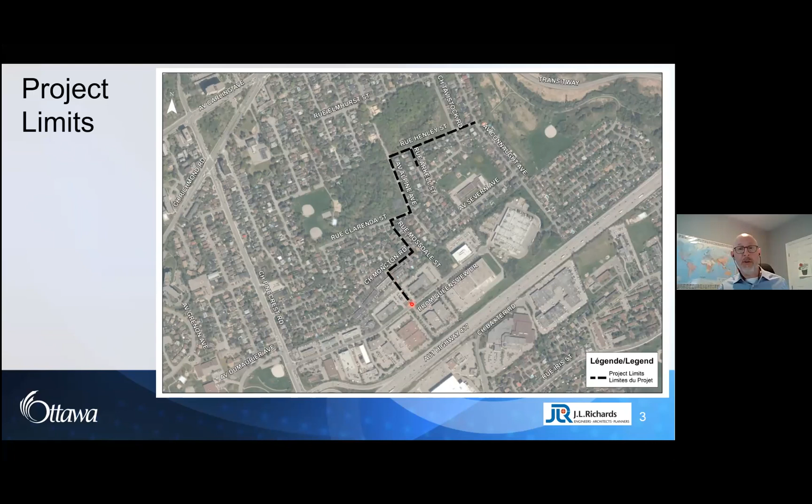So essentially, I'll give you a quick overview of what type of work we're going to be doing, and I'll elaborate further on some of these points later in the presentation. What's driving the project is having to replace an aging trunk storm sewer that runs through the neighborhood on Moncton, Mossdale, Clarenda, Alpine, and Henley Street. We're going to be realigning a section of trunk storm sewer and trunk sanitary sewer along a portion of Alpine and Henley Street. We're going to be replacing the local trunk storm sewer and sanitary sewers at the north end of Arkell with new local sewers. We're going to be abandoning a section of existing trunk storm and sanitary sewers within an easement that runs between Alpine and Arkell.

As part of the work, we'll have to replace select sections of sanitary sewer and some water mains, as well as house service laterals impacted by the trunk storm sewer replacement. We'll be reinstating roadways, grass boulevards, and any landscaping impacted by the underground work. There'll be utility relocations, much of which has already taken place, including gas relocation work on Moncton, Mossdale this past fall, as well as on Alpine. Lastly, there'll be fairly extensive tree planting to compensate for existing trees that have to be removed to accommodate the trunk storm sewer installation.

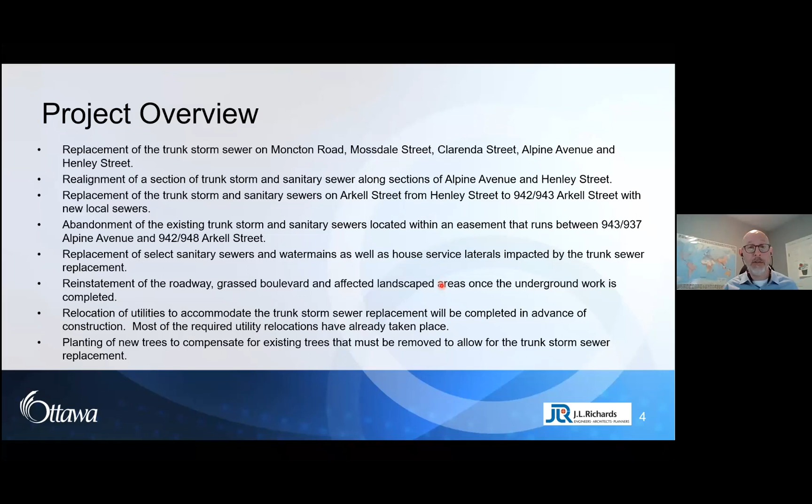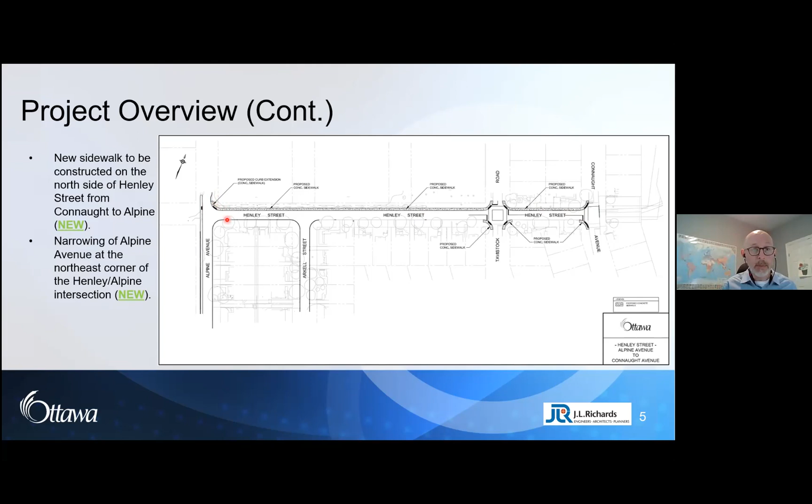One new component to the project, different from the previous public information session, is that the scope of work has been expanded to include construction of a new sidewalk along the north side of Henley, extending from Connaught to Alpine. At the northeast corner of Alpine and Henley, Alpine will be narrowed slightly, or what they call a bulb out, to act as a traffic calming feature along that steep section of hill. That's the new scope added to the project.

Stepping back, what's driving this project and why is it important? Through the Queensway Terrace North neighborhood, there's a large trunk storm sewer running underneath the roadway that drains a very large tributary area. This outline gives you an idea of the extent of the drainage area served by that trunk storm sewer, extending well south of the Queensway all the way up to Baseline.

This critical piece of infrastructure is in poor condition and needs to be proactively replaced within the current project limits. There is a trunk sanitary sewer that runs parallel to the same trunk storm sewer we're replacing, however it's in good shape and not in need of replacement.

Since we're replacing the existing trunk storm sewer with a new pipe, the city is taking the opportunity to improve the overall hydraulic performance of the system by installing a larger pipe than what's currently there.

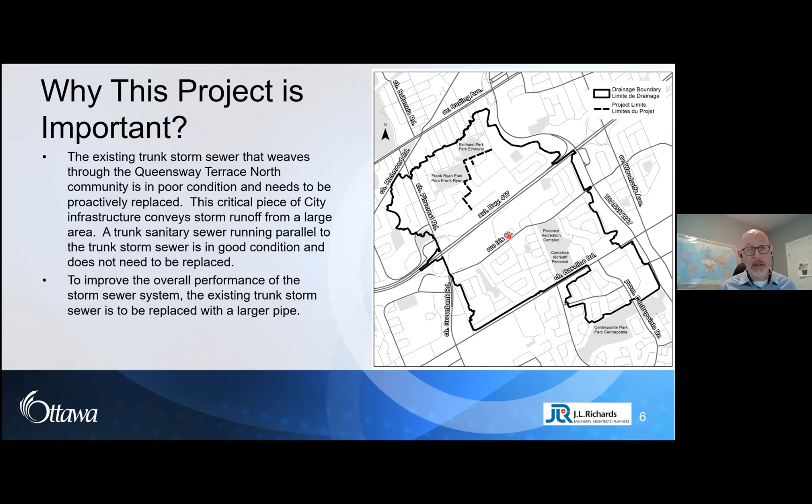We've had discussions with some of the residents in this area, but right now the trunk storm sewer basically runs north down Alpine from Clarenda, cuts over to Arkell through an existing easement, then runs north on Arkell, and eastward on Henley. So right now that trunk storm sewer, and the trunk sanitary sewer that runs parallel to it, is located with homes on either side. We're not able to replace the storm sewer in its current location due to the proximity of the homes.

So the project includes realigning that section of trunk storm sewer, continuing it north down Alpine, and then eastward down Henley Street, where it'll rejoin its existing alignment. Since we're doing that with the trunk storm sewer, we're also going to take the opportunity to realign this section of trunk sanitary sewer. That way, the city will be able to eliminate having these two large pipes running between these homes on Alpine and Henley. People familiar with the area will know the topography is quite steep near the Alpine and Henley intersection.

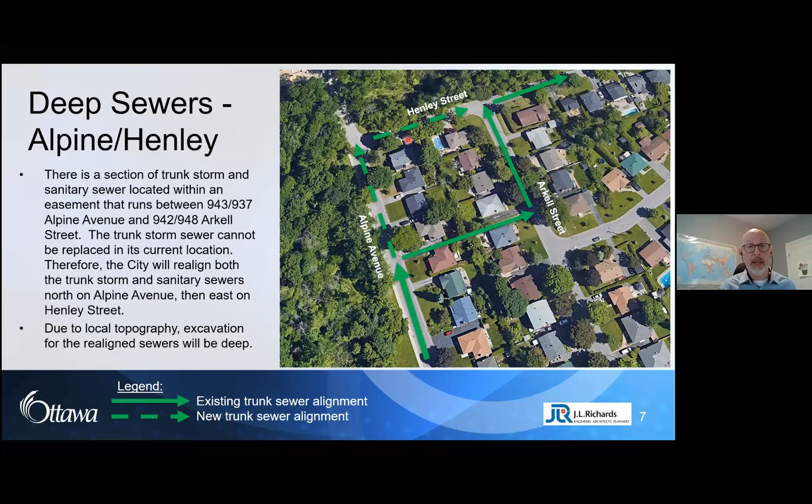As a result of this steep topography, or grade differential, when we're replacing or realigning the trunk storm and sanitary sewers along this section of roadway, the sewers will end up being quite deep. As a result of the size of the pipes and the depth of the sewers we need to install in this area, we're anticipating there will need to be a hard closure of Alpine and Henley that would last for the better part of the 2021 construction season.

However, access is still going to be available to Carling Avenue via either Tavistock or Connaught, so those intersections or accesses would remain open while this is closed. We've had separate discussions with residents in this area, but there is the likelihood that construction work will result in loss of driveway access for an extended period of time. The contract includes provisions for alternate parking as close as we can to people's homes, and requirements for the contractor to construct temporary pedestrian access from these parking areas to people's homes so that they can still access their properties.

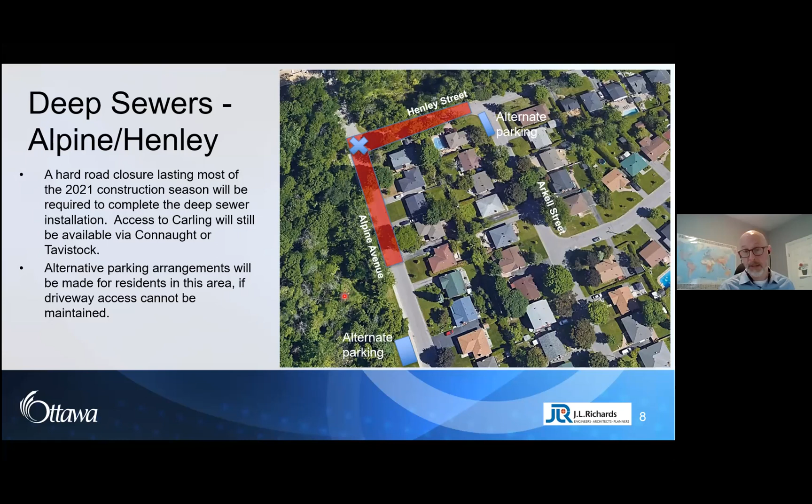We heard this at the last public information session, that the sidewalk along the west side of Alpine is a really important pedestrian corridor, giving the community pedestrian access to Carling Avenue. So recognizing the importance of this pedestrian link, there's a requirement for the contractor to install a temporary asphalt pedestrian walkway along the west side of Alpine, around this deep sewer work, to keep that north-south pedestrian link operational during construction.

Many of you might already be aware that this project will result in a fair bit of impact to some existing trees in the neighborhood. Right now we have to replace the trunk storm sewer in its current alignment, and there's no opportunity to find a different location within the city's right of way to put it. So we have to put the new pipe basically where the old pipe is, and the existing pipe is located in close proximity to, or directly underneath, a number of mature trees, many of which will have to be removed to accommodate the trunk storm sewer installation.

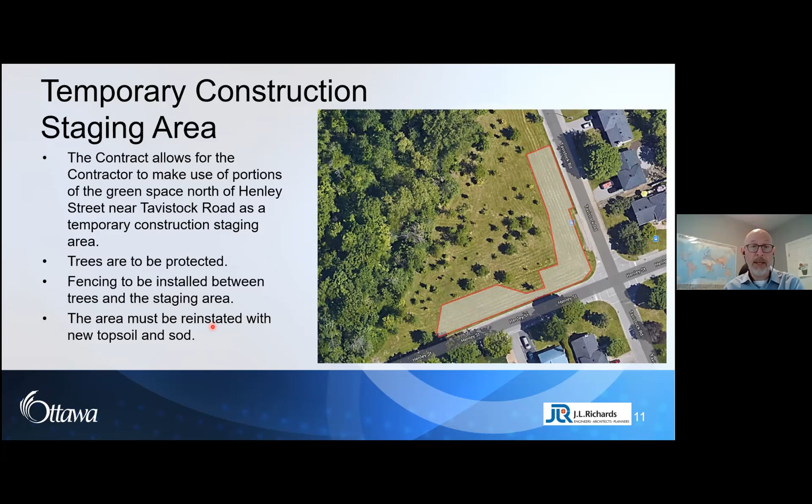So we have a bit more detail now in terms of the project schedule. Right now the project is currently out for tender, so contractors are in the middle of preparing their bids to undertake the work. We're expecting that to wrap up in the coming weeks, with construction starting in late spring or early summer of 2021. The overall project will take place over about 2.5 years, starting in 2021 and wrapping up in 2023.

A little bit more breakdown: in the summer and fall of 2021, we'd expect the contractor to be doing the underground work, the trunk storm sewer installation along part 1, including the realignment of the trunk storm and sanitary sewers we spoke of in that deep section. After that work is completed, we'd see the contractor reinstate the area, installing that north sidewalk we spoke of earlier on Henley, and reinstating the roadway or any disturbed roadway surfaces back up to base course asphalt. That would be completed in advance of winter.

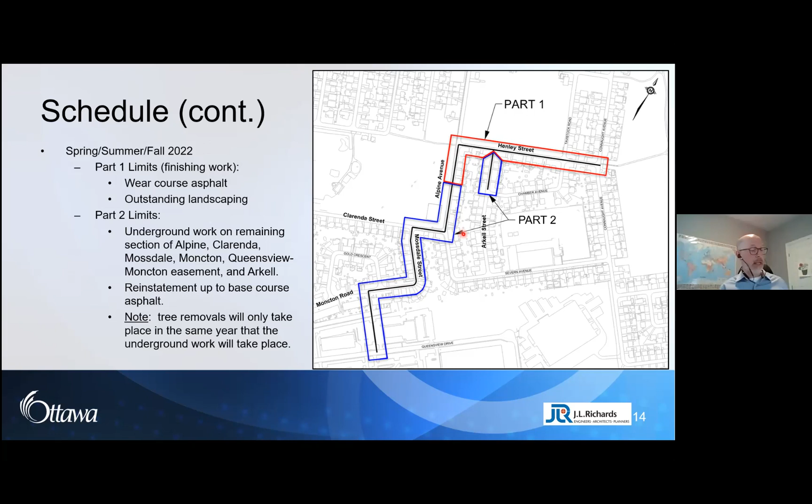So now moving into next year, the spring, summer, fall of 2022, we'd be wrapping up the finishing work on the part 1 limits. That means the contractor would be putting the top coat of asphalt on and any outstanding landscaping. Then you'd be seeing the underground work taking place on part 2, replacing the trunk storm sewer. By the onset of winter, the contractor would have reinstated the roadway back up to base course asphalt. The project would wrap up in spring, summer of 2023, where the contractor would be returning and completing the top lift of asphalt on the part 2 limits and taking care of any remaining outstanding landscaping.

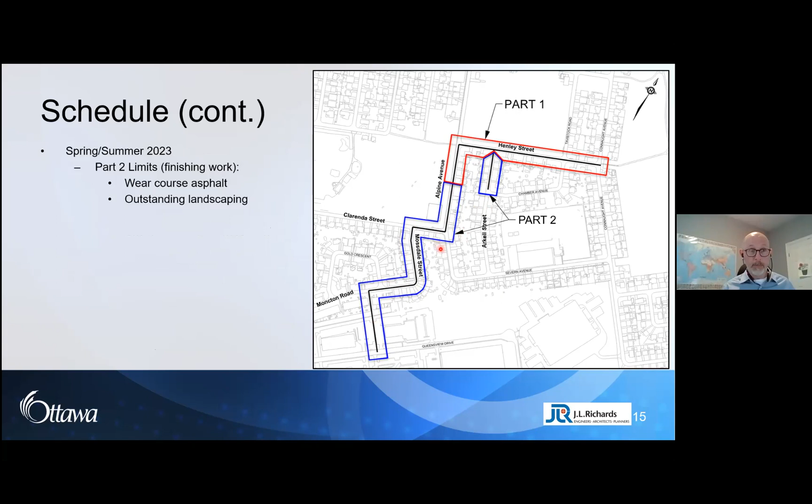So these next few slides will run you through a little bit about some typical things people can expect. Obviously, this type of work will result in some impacts and some disruption. So we're going to go through a few of these items and talk about them, and some of the mitigation strategies.

Generally speaking, in terms of traffic, while the contractor is actively working on a given street, we generally expect that section of street would be closed, with people able to circulate around the adjoining streets and detour around the active construction area. Now, even within the active construction area, local access would still be maintained, so people would still be able to drive to their homes and get into their driveways.

That being said, there would be some intermittent temporary limited access to driveways. As the equipment is digging and installing the sewers, they'll be moving along, and at some point they'll have to move across the bottom of someone's driveway. In those instances, there may be a loss of access temporarily for a day or a couple of days. The project team would be reaching out to homeowners in advance, giving them lots of advance warning of what's coming. People would have the option of the city handing out temporary orange parking passes that they could display on their windshields, allowing them to park on a neighboring street or close by where parking's permitted, without getting a ticket.

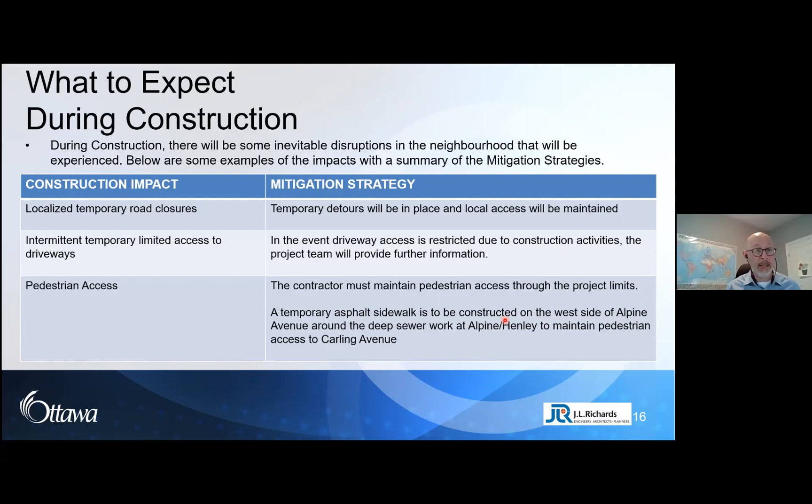Construction noise: yes, there will be construction noise. These types of projects require a certain size of equipment to undertake the work. We do know that in the vicinity of the Alpine and Henley intersection, where some of that deeper sewer work needs to take place, there is rock. The contractor will have to break apart and excavate rock, so there'll be some noise impact from that. The contractor is still subject to the provisions of the city's noise bylaw in terms of how loud the noise is, as well as their working hours, which are all dictated by the city's noise bylaw.

Dust: with construction taking place in the summer, and if it hasn't rained in a little while, there will be some dust generated by the construction activities. Some measures the contractor has at their disposal to help mitigate dust is they will often apply water or apply calcium chloride to unpaved surfaces, to try and limit the amount of dust. The contract also includes use of street sweeper trucks, which would circulate on a regular basis on surrounding streets, cleaning up any dust or debris from construction that might make its way onto the roadway.

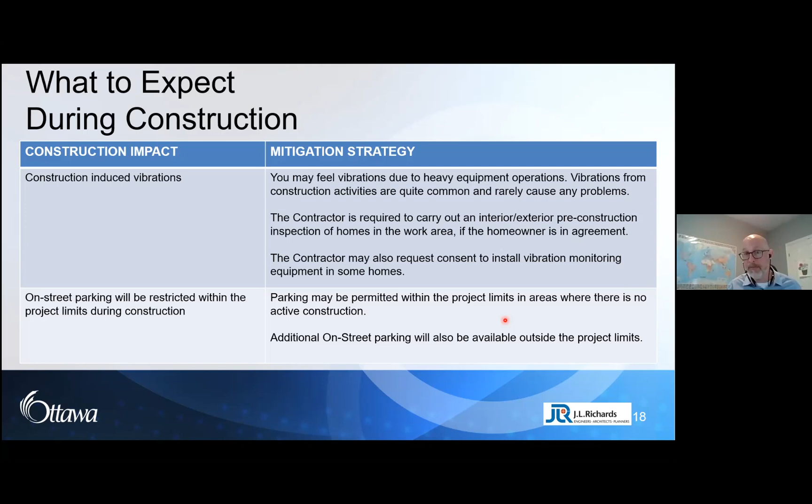On-street parking during construction within the active construction area is generally restricted, since you don't want parked cars interfering with the construction operation. Although as construction gets underway, the contractor may still allow some permit parking within the project limits in areas where they're not actively working. On surrounding side streets, not within the project limits, parking would still be available subject to whatever current parking restrictions are in place.

So, brief water interruptions. In order to accommodate the installation of the trunk storm sewer, there are some sections of water mains and individual house services that will need to be replaced. To carry out that water main work, there may be some brief interruptions to water supply, generally fairly short, maybe several hours, certainly no more than a day. The city's drinking water services would circulate notices in advance, so you'd have ample notice of any upcoming interruption. Again, these are all very temporary.

There are some individuals where the water main replacement needs to be more extensive, and some homes will need to be put onto temporary water services. That means your water, still city water, will be delivered to the home via overland hoses rather than underground pipes. In the process of setting up those temporary water services, there may be some brief water interruptions while homeowners are switched from the current city supply over to this temporary system. We expect homes to be put on temporary water at the north end of Alpine, the west end of Henley where we're realigning the trunk storm and sanitary sewers, and at the north end of Arkell Street. Those are the homes that people in those areas would expect to be put on temporary water.

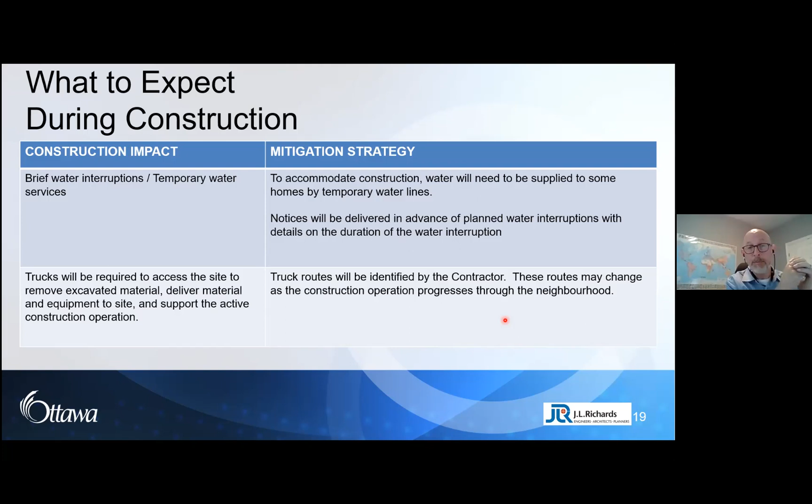That essentially is the end of the presentation. As mentioned earlier, Kevin Gibbs is the city project manager. It's a lot of information to take in, and people may think of a question after the fact. Kevin's email is there, so certainly reach out to him and we can answer people's questions. It doesn't just have to be something you think of on the spot right now. Some questions did come in advance, so if people are okay, I'll run through some of these now.

A question came in about the Alpine sidewalk and whether it would be operational during construction, and yes, it would be. We will have to build a bit of a temporary bypass around the construction, but that north-south corridor will remain active.

As for the timeline for the various stages of construction, we got into that a little bit. Until we get the contractor on board and have their more detailed schedule, that's how we see the project unfolding at a fairly high level.

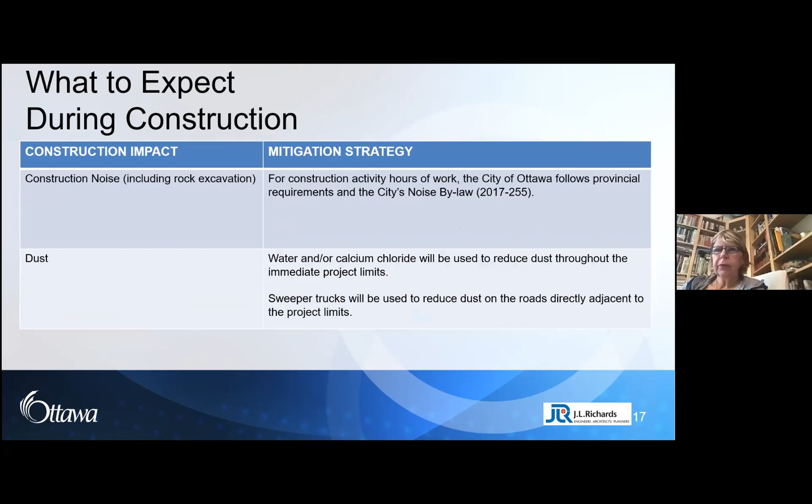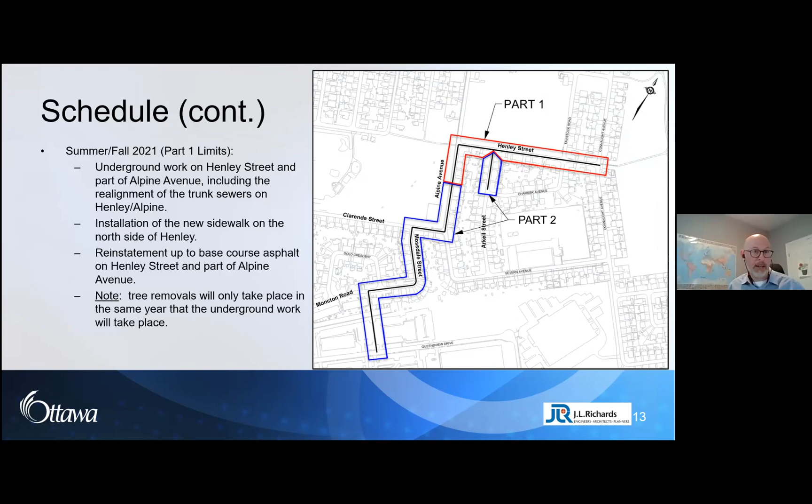Sheila P. is asking about the work necessary to address water flow out of Elmhurst Woods onto Henley in relation to the construction of the Henley sidewalk. So this is about drainage, and I know exactly what they're talking about. Yeah, there's a downward flow. Anytime I've been out there, including this spring, you've got a steady flow of water coming out of that wooded area, running down and topping over the curb and down the street.

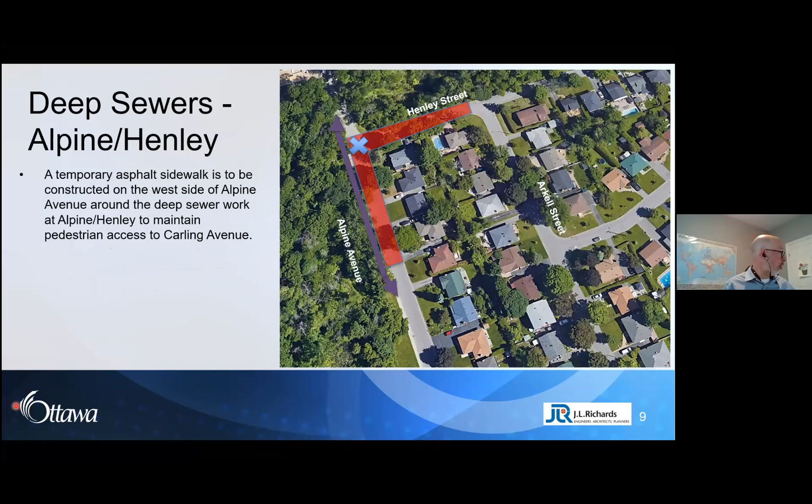So while we are doing that, let me see if I can bring another image over. I'm just going to load up an image here, zoom in, and give it a second so it can refresh on people's screens.

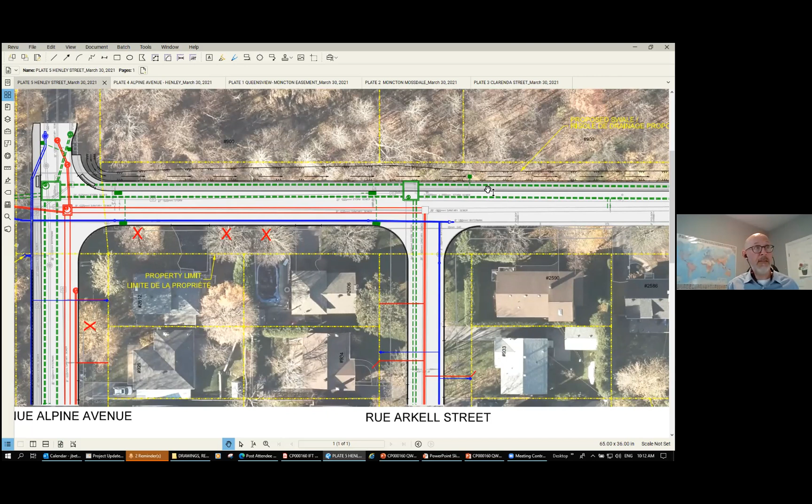As part of the work on Henley, we'll be putting the sidewalk in on the north side, and just in behind that sidewalk we're going to have a nice little swale that intercepts the water coming out of the woods. We'll also have periodic drainage structures just behind the sidewalk that the water can flow into, getting it back into the storm sewer system. So that nuisance runoff from the woods onto the roadway should be eliminated by this project. Okay, excellent question, Sheila. Thank you.

Will there be a requirement for the contractor to control and remove garbage from the site? The prep work left food-related waste that we in the community had to collect and dispose of, especially around the porta potty on Clarenda.

Well, certainly the contractor should be keeping their site neat and tidy and shouldn't be leaving garbage behind. The city does have an on-site representative who will be keeping an eye on those types of things. If people in the community notice the contractor falling out of line, they can get in touch with us or our on-site representative, and we can have a chat with the contractor staff on site to make sure that doesn't happen. We'll make sure we have their email and stay in contact so we can stay on top of things.

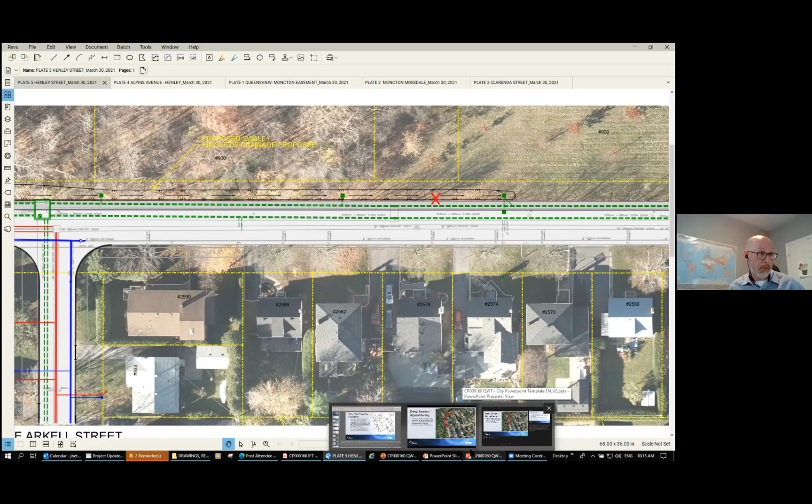So by the end of 2021, before winter, we would expect the contractor to have the pipe in the ground, backfill the hole, rebuild the road, pave the first layer of asphalt on the roadway, replace any curbs, and install that north sidewalk. That's our expectation for the end of this construction season.

Leah is asking whether the Henley sidewalk will be directly beside the road or if there's a separation. Yes, it is - it's what they call a monolithic curb and sidewalk, so the curb and sidewalk are all one piece, similar to the one on Alpine.

There'll also be some work done on the Alpine sidewalk, reinstating it. Yes, where we're realigning the sewers, we're going to reinstate that back. It's always a question of what standard you use when reinstating - new standards, or the same as before.

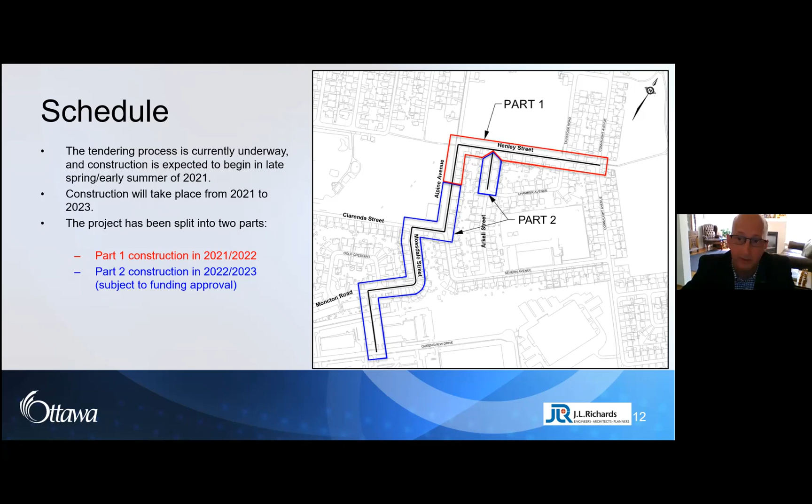Jason, can you pull up the big picture of the drainage area, or the picture showing the perimeter arterial streets? One thing to consider about this construction project is that it's inside a community area, a neighborhood, in the center, so the access and egress of all trucks will be from the perimeter streets - trucks have to take local roads to get to the site. That's the particular nature of this project. Phil, jump in - you or Brittany can speak to that.

Thank you, Councillor. Brittany is here with me - she's the person who looks after all traffic-related issues for construction in the whole city, and she's been working closely with the team on this project. As she mentioned earlier, we're going to be collecting data on streets and can provide you that list, because any changes we make through construction, we want to make sure we have data to support what issues are being seen.

If we see increased volumes or increased speeds, we can look at putting in temporary measures, like the paint on the road mentioned earlier, or other measures with posts and things to create more friction on the road. One good thing about this project for traffic flow within the community is that we're not closing the street - everyone still has access either to Carling or to Pinecrest, so we're not expecting double the traffic at, say, Pinecrest and Kelly, because no one can get through Carling.

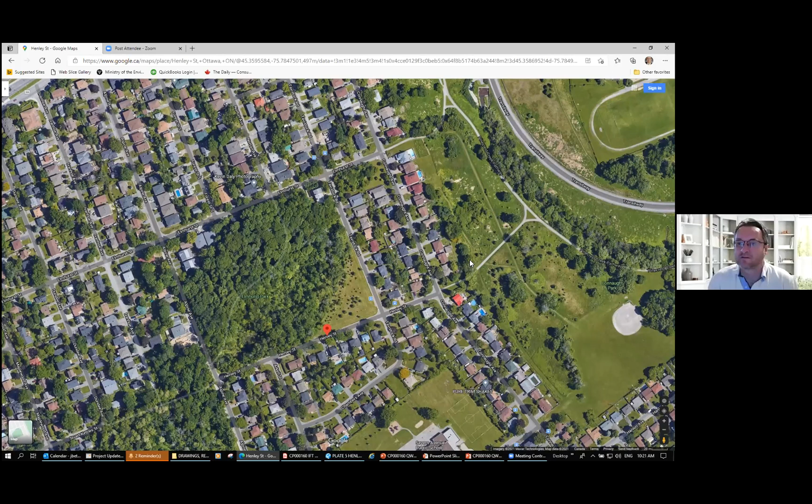Is this during construction or after, when the construction's all done? After, so this is an opportunity to install it. I haven't seen the actual design. I don't know, Kevin, if you can talk to what's being planned.

This was brought up in a comment, and transportation planning is currently investigating the possibility of a PXO, a pedestrian crossing at Alpine and Henley. They're looking into it. It's a detailed exercise where they look into the pedestrian numbers and the peaks and stuff like that. We don't put in PXOs everywhere in the city; we put them in where the numbers justify it. So they have a very specific process with evaluation criteria that establishes if a PXO is justified at that location or not.

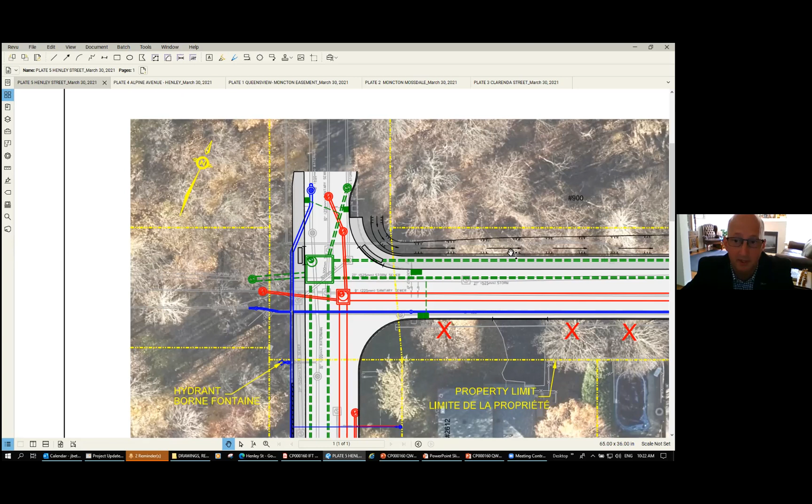So we have to go through the process, and I can keep you posted on how that's developing. Well, that's a bit awkward when there's going to be construction there. Is that going to, I mean, there's just an ideal time here because construction is going on. Just like getting the sidewalk in at Henley, this is an ideal time to perhaps raise it a bit, just so people will slow down. Have a raised crosswalk? Yeah, they're looking into it, so that's all I can say at the moment. I don't know where it stands.

I could follow up, but they're currently looking into the justification of a PXO at that location. During construction, that intersection will be closed, so there will be no problem - it'll be fenced off, people can cross the street no problem. Alpine will be closed at Henley.

Here's a question: have you ever considered that if you put a crossing, there would be more pedestrians? It's kind of a chicken and egg situation rather than measuring it before and after. There's a very specific process to evaluate the installation of a PXO, and it has to go through its detailed investigation process - I can't speak to all the details of that. I can just assure you transportation planning is looking into it.

I would be very interested to see something there, because I think this is an opportunity while construction is going on - just as with the Henley sidewalk, it was decided it was worth doing because you're tearing it up anyway. Great opportunity, and I really appreciate it. This is just a small extension, and because it's going from one wooded area to the other, it's popular, and because of that hill on Alpine, it's a little intimidating because people tend to speed up going down hills. So I'd certainly be in favor of that.

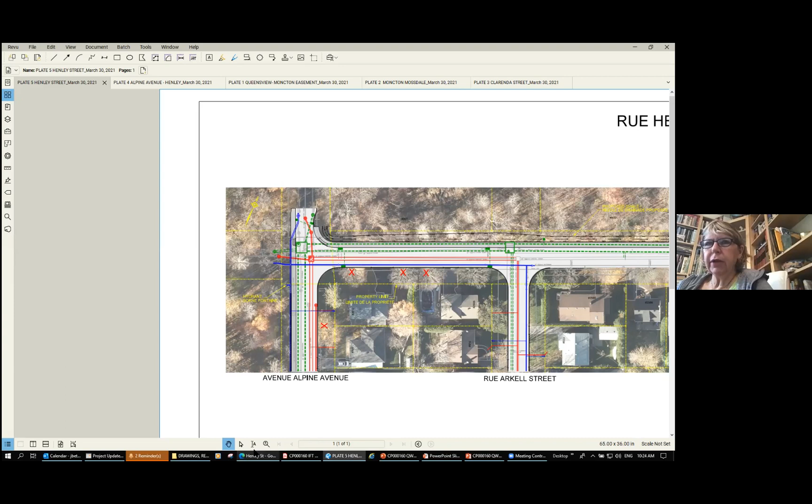In terms of Tavistock right now, is there anything that can be done immediately to look at reducing traffic, to get their head around the fact that they shouldn't be using it as a speedway or anything as they're coming into the community?

Hi, Councillor. Chantel and I are going to touch base - we've spoken here in the chat together, so okay, great. We're going to take some of that concern offline. But...

Tavistock has already been reviewed in 2018 by the temporary traffic calming group. They looked at flex stakes that weren't available, and we can't use speed humps because of the presence of the OC Transpo route. So it has already been reviewed in detail. We are going to collect some additional data in advance of construction so that we can monitor that through construction. For now, we definitely hear the concerns, and we'll be following up to see what we can do.

That'd be great. Yeah, so just keep us in the loop, because we're certainly working - we'd like to see how these things fit in with the whole community. Is there anything else you can add, Brittany, in terms of the traffic patterns that are going to change, for example, regarding Kelly? I know I've asked this a bunch of times and the answer was no for a light there.

But in terms of managing increased volume - Kelly is actually going to decrease in volume during that phase 2 construction because the access at Clarenda will be flagged by the contractor, so you'll have to drive through that construction. You won't see the same volume of traffic coming into the neighborhood or cutting through to other homes. It would be the local residents west of Clarenda, between Kelly and Clarenda, and they'll have the option of either exiting at Kelly and Pinecrest like they do today, or going through the construction zone at Clarenda if they're more comfortable to exit at Carling and Tavistock or Connaught, where there are signalized intersection accesses.

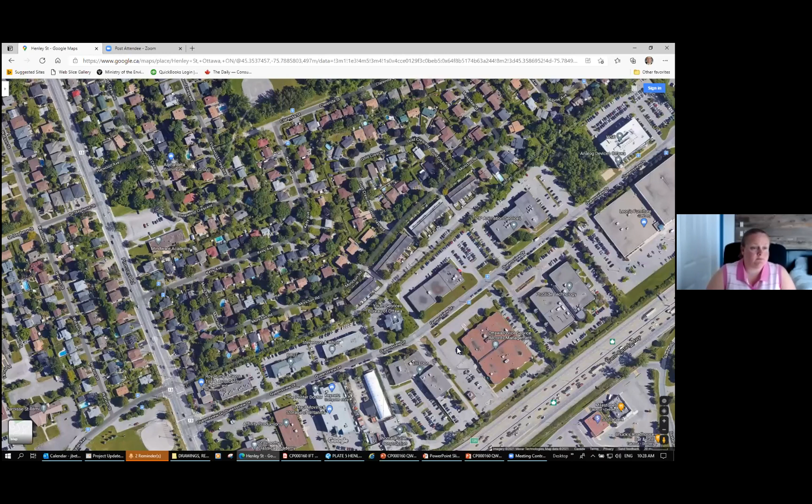Lee is asking, has the additional traffic impact of the construction of the Connaught sidewalk in 2022 been considered in terms of further limited access to Carling?

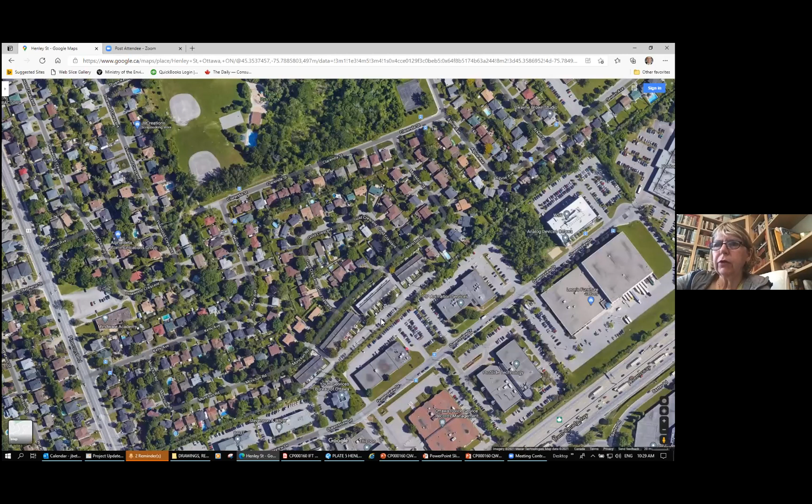I don't understand the question, can you please repeat it? Well, there's going to be the construction of the Connaught sidewalk in 2022, and she's asking will that also be an impact in terms of additional traffic problems? I don't think so. I don't think so either - it's going to be constructed in 2021. The sidewalk, yes, it'll be constructed this fall, I would anticipate. And I suspect it will increase pedestrian traffic. Anyway, thank you for that question. So you've heard the concerns, and I appreciate, Brittany, your work on just looking at the overall picture of the traffic pattern - that's really helpful.

I think there really is a great opportunity to do something on Alpine at Henley for a raised crosswalk. We've been dealing with these questions on the other side on Connaught as the sidewalk got put in, and it's been very helpful. We had an incident where someone's dog was killed on Alpine from rushing traffic, people driving too fast, so we know there's been issues. Really appreciate it. Anyway, Kathy says thank you for the presentation.

And the response on the wood chips. Okay, that's great, much appreciated.